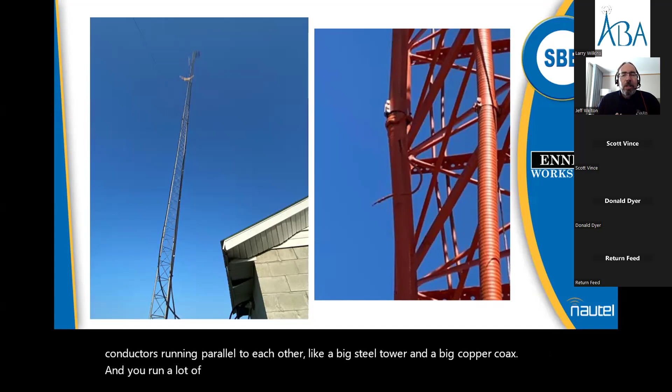Number one, if you've got two conductors running parallel to each other, like a big steel tower and a big copper coax, and you run a lot of current through one of those, you've got a capacitor, so you can induce a lot of current in the other one. Number two, a 24-inch or 36-inch ground lead, those are the two common sizes, makes a really good antenna for re-radiating a lot of spurious stuff.

So I've run into a lot of LTE interference complaints, for example, that have been traced back to grounding kits that weren't bonded well on the tower. And that's something else to realize.

We're going to use two words here a fair bit. I'm going to talk about grounding and I'm going to talk about bonding. Effectively, grounding is where you attach the wire and bonding is how you attach it. So bonding could be a mechanical bond, like just screwing two pieces of strap together, or an exothermic bond, like Cadweld, Sil-Fos, silver solder, brazing, whatever have you. That'll be my preference whenever I get it, and we'll get into a little bit about why that's important as we go too.

As you can see, this is a presentation that I built most recently for the SBE's Ennes RF 101 workshop, the 2-day workshop prior to NAB this year.

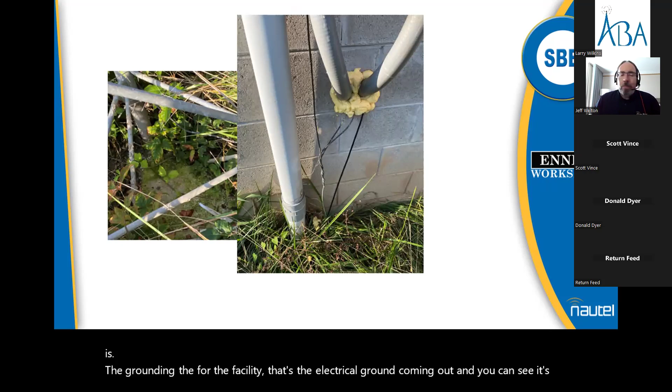So one of the things we noticed when I got out there was that what you're looking at in that right-hand picture is the grounding for the facility. That's the electrical ground coming out. You can see it's just a couple of soft ground copper, basically AM ground radial wire that's been twisted together. Once that oxidizes a bit, that's not a really good ground.

And the thing to remember most about grounding is that wherever possible, you want short, straight runs. You also want what we call common point ground or a star ground, single point grounding.

That can get a little tricky. If you're in a Cellco or cell company type building, the kind that have the green wire around the ceiling, the halo ground, those work great. But they've typically got a ground lead coming down from that halo at all four corners of the building and going outside. And if you connect all of those to a ground rod, you'd better strap all those ground rods together. Otherwise, you've just totally lost control of your grounding, and you got circulating currents everywhere.

I tell people I like halo grounding done right. The problem is I almost never see it done right. So that's something to pay a lot of attention to.

One of the other things I see a lot of is there will be an AC ground coming in from the power pole outside, and it'll come into the building at one side, and then the coax and tower ground are at the back side on the opposite end of the building. And if those aren't bonded together, that's a problem.

In some areas, you'll get some older electrical inspectors that'll still resist that. Since around 2005 or so, I don't remember exactly when, Article 250.4 of the NEC, the National Electric Code, is what deals with facility grounding. In the early 2000s, that code was edited to specify that the facility ground and the AC entrance ground must be tied together.

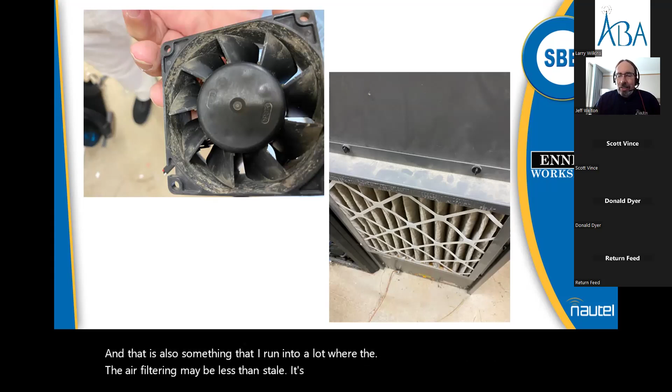Now, grounding on its own isn't going to solve all the problems. You need to keep the place clean, and that's also something I run into a lot, where the air filtering may be less than stellar. So that's also a challenge that we want to look after.

Back to the grounding and the tower ground. This PowerPoint got put together, and I don't know what happened in PowerPoint when I saved it -- it doubled some slides and threw some around in different orders. Anyway, getting back to the tower ground, you've got your ground kits on the tower.

Those are fairly, relatively speaking, low gauge, small gauge wires. They're typically in the range of 6 gauge, give or take, 6 to 4, in that range. Relative to, say, a 4-inch strap, that's got a fairly high resistance per foot and a fair degree of inductance for any high frequency component. So it's not an ideal ground.

The real purpose of those is to help bleed off any surge as it starts to build up, and they definitely need to be installed. They need to be there. They also break up that capacitance that I was talking about earlier, to cut down again on inducing stuff.

But really, once you get to the base of the tower, that coax needs to have a ground kit installed. I prefer to see them where the coax comes into the building, because you'll typically have a couple of coaxes -- maybe an STL coax, transmitters, maybe a translator or two -- and you can put a bulkhead panel right at the entrance to the building and put a ground kit on each of those cables and connect it to that bulkhead, then a single strap running down to your reference ground point. Short, sweet, and simple. That's really what we want to accomplish.

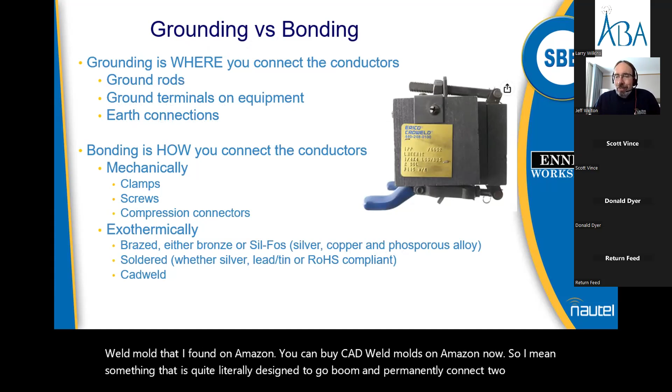Now, one of the things I mentioned earlier is grounding and bonding, and how I prefer exothermic connections, and Cadwelding is a good example. That picture is a Cadweld mold that I found on Amazon. You can buy Cadweld molds on Amazon now. So something that is quite literally designed to go boom and permanently connect two conductors is easy to get now. It used to be you could only get them at an electrical supply place, but yeah, Amazon, who knew?

And the good thing about it is that at that point, you're not relying on compression connections. And I really don't like compression connections. A challenge with compression connections is that anytime you have a wire in a clamp, and it's just a screwed down clamp, copper's malleable. It's this very soft metal, and it will deform to displace any air in that connector.

So unless you manage to get it yanked down tight enough to displace all the air on install, then in a week or two, that copper is going to have deformed a little bit to displace the air, and that connector is now loose. How many people have run into a situation with a crimp connector where somebody didn't have the proper crimp tool and just squeezed it with a pair of dikes or beat on it with a hammer, and it comes loose after a while?

So if you're going to do a crimp connection, it's essential to have the proper tool to do the job. If you're going to do a clamp connection, in some cases you don't have a choice. If you've got a ground wire and a flat like a bulkhead panel, it's hard to weld or solder a wire onto a piece of 4-inch by quarter-inch copper bar.

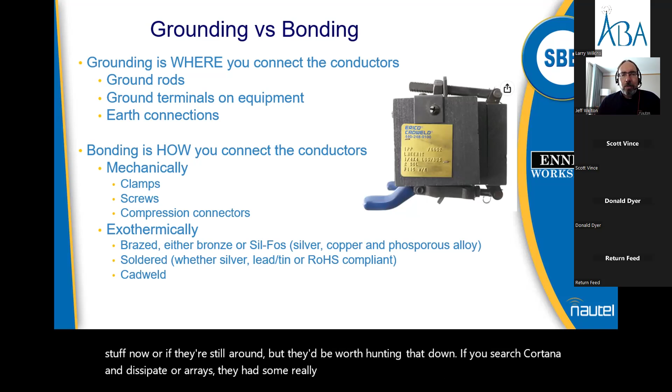Each room, studio, production room, whatever, has its own ground point. Maybe the TOC has a ground point, and then you tie all the grounds together to your facility ground, so you've still got single point grounding. You just do it in more of a branch format.

Again, the goal is to try to avoid running from one thing to another thing to another thing and then back, just creating ground loops. Those can be a little hazardous. So we definitely don't want to see that.

I ran into a site in San Antonio a bunch of years ago where they'd put in a transmitter, and he called me up and said, 'Hey, I installed those ferrites y'all gave us.' And I said, 'Cool.' I'll talk about ferrites in a bit too. But he said, 'Yeah, we got a problem. The ferrite on the main transmitter is getting warm.'

I said, 'Yeah, if it's getting warm, then you've got a ground loop because you need to have the feed and the return equal.' And he goes, 'You don't understand. The main transmitter's turned off. We're on the standby.' It turned out they had so many ground loops that there was a lot of RF current going through the shield of the main transmitter's coax, even when the transmitter was off.

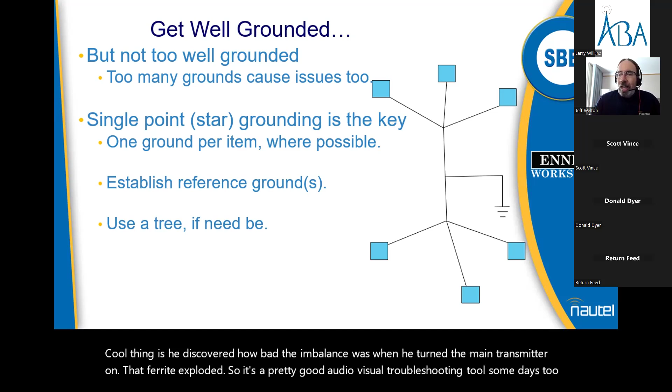The cool thing is he discovered how bad the imbalance was when he turned the main transmitter on. That ferrite exploded. So it's a pretty good audio-visual troubleshooting tool some days too. But that is the kind of thing that single point grounding will help eliminate.

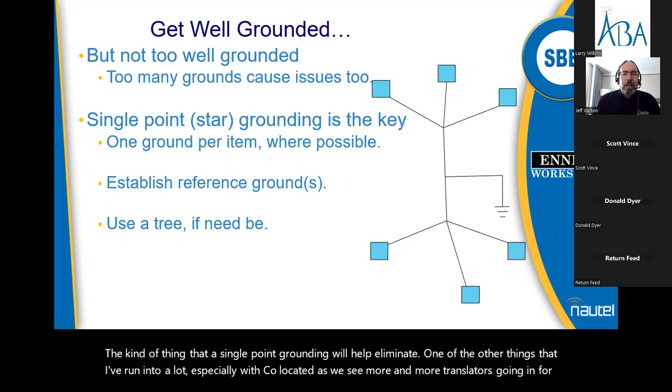One of the other things I've run into a lot, especially with co-located sites, as we see more and more translators going in for AMs, you co-locate an AM and an FM, and you can a lot of times get the audio from one onto the exciter for the other, depending on what you've got for gear. The grounding will quite frequently be a contributor to that as well. So just something else to think about.

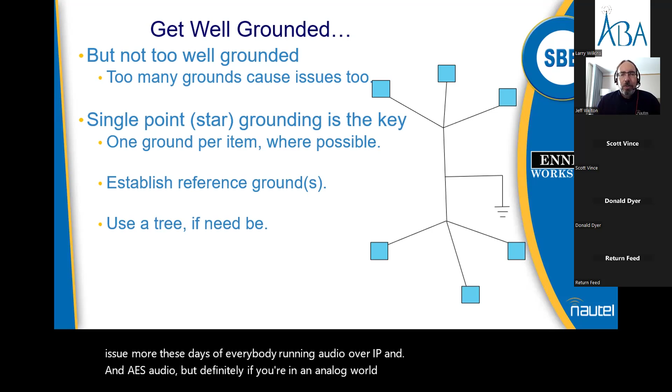That's less of an issue these days with everybody running audio over IP and AES audio, but definitely if you're in an analog world, it's pretty easy to induce RF onto an audio cable shield. So something else to think about.

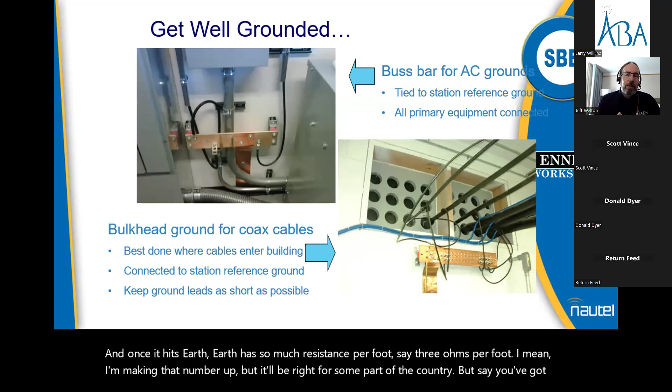Not because it's really all that much an issue, but we're playing a current divider game. If you start at the tower and head back to the AC lines, that's basically where lightning is going, because you get a big surge of current coming down a tower, and once it hits Earth, Earth has resistance per foot. Say 3 ohms per foot, I'm making that number up, but it'll be right for some part of the country. If you run 100,000 amps of current in a lightning strike down that tower at 3 ohms per foot, and you've got a 3-foot distance, that's 9 ohms. 100,000 times 9 ohms, E equals I times R. That's 900,000 volts developed from left foot to right foot, which is why they always tell you if you're caught in a field in a lightning storm, put your feet together.

There's more to that story. You put your feet together... anyway, I won't get into it in a recording.

Point being, everything we can do to minimize the resistance of the path we want the lightning energy to take, that's what we're going to want to do. So if I can make those wires 6 inches shorter, and they've got a resistance of 1/10 of an ohm per foot, collectively that may be a couple of ohms I've taken out of that path to ground, or that path between ground and the surge protector. That's the ultimate goal here: short and straight wherever we possibly can.

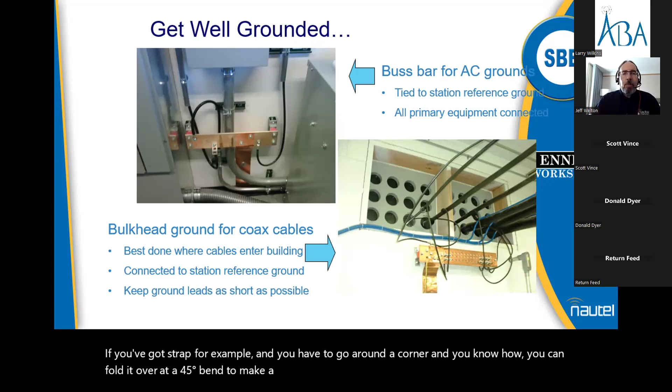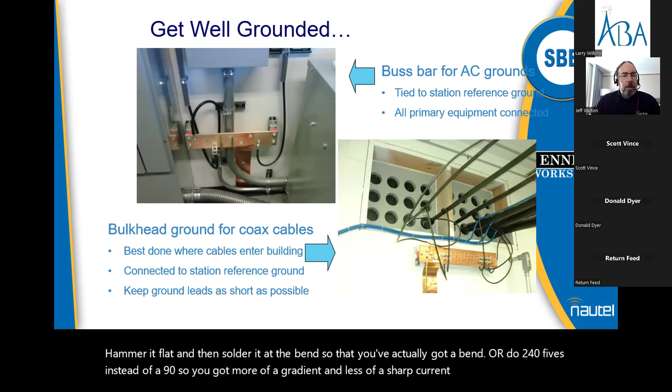If you've got strap, for example, and you have to go around a corner, you know how you can fold it over at a 45-degree bend to make a 90, hammer it flat and then solder it at the bend so that you've actually got a bend, or do two 45s instead of a 90. That way you get more of a gradient and less of a sharp curve. Lightning doesn't like to turn corners. Any amount of significant current doesn't like to turn corners. So, short, gradual gradients whenever you can.

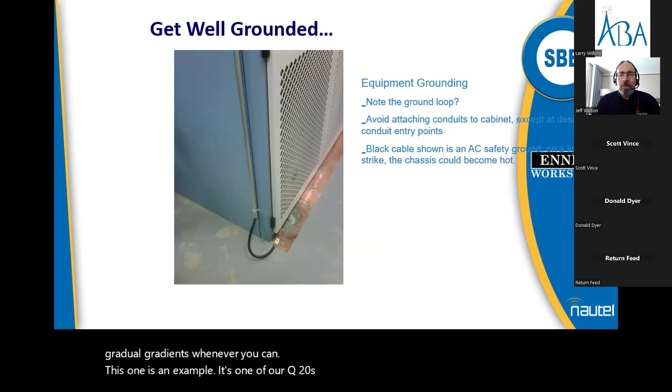This one is an example. It's one of our Q20s, a 20 kilowatt FM we built a bunch of years ago. I know there's one or two of them, or have been, in Alabama, and a bunch of various others. This one happens to be in Missouri, and they were having quite a few power supply problems.

We came in, or I came in, and started at the tower and walked back, because that's the easiest way to follow your grounding, is to quite literally follow your grounding. So you start at the tower and you walk your way back.

What I found was there was a beautiful, nice, bright, shiny ground strap at the base of the tower, and it went into the building, came around to the ground connection on the back of the transmitter. The surge protector had a ground wire, and it also had a wire running over to that ground strap, what you're seeing here coming out of the conduit.

Now, two things. Number one, as I followed this ground strap from the tower into the building, the one thing I did not see was a ground rod. So any energy coming down that 600-foot tower, or whatever height it was, was going straight onto that strap, right to the back of the transmitter. That's item number one.

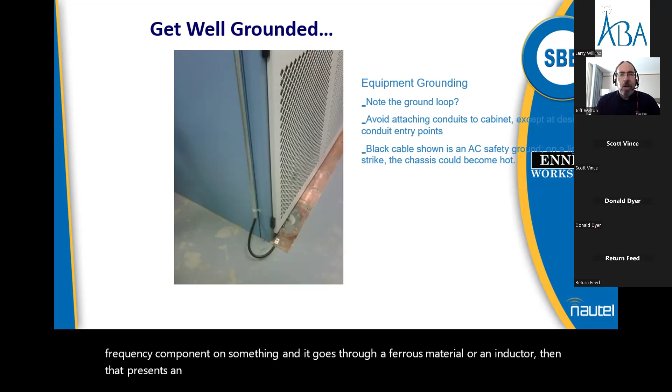Item number two, the primary ground, which is relatively speaking a fairly low resistance wire, that 2-gauge cable, is going through a conduit. Now, we'll talk about ferrites in a bit, but a ferrite is a ferrous material. If you've got any high frequency component on something and it goes through a ferrous material or an inductor, then that presents an impedance. Well, steel conduit is also a ferrous material. So you've got a one-turn inductor with that wire running through that conduit, which means you're adding more resistance.

So in this case, all this energy is hitting the ground connection at the back of the transmitter. There's no easy discharge path through the surge protector to the power lines. The only place for the energy to go to discharge was through all the switching supplies. So we put a ground rod out at the tower.

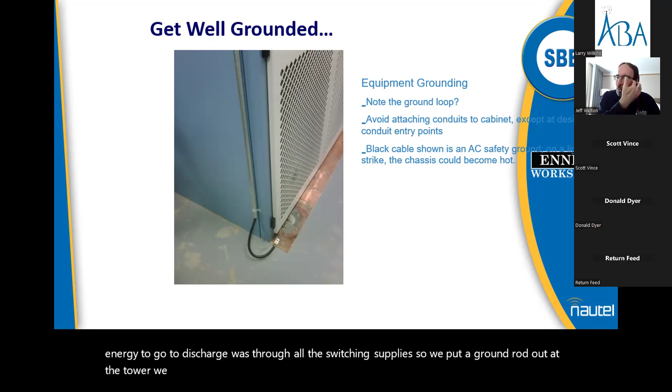We replaced the AC entrance ground rod because it was only a couple of feet long and driven at a pretty steep angle, and put a proper rod in there, bonded those two together outside the building, and then fixed the grounding to the surge box.

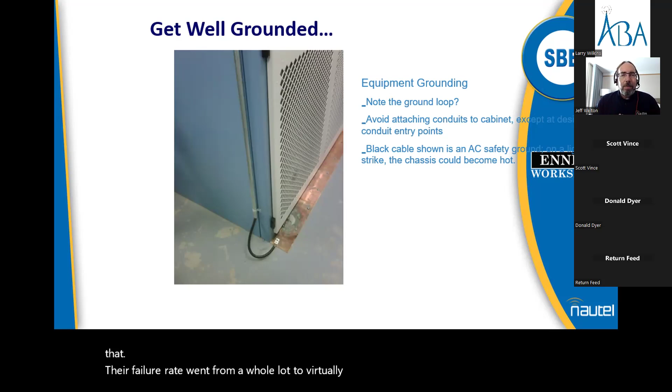In the process of doing that, their failure rate went from a whole lot to virtually none. I won't say none—they've had one or two failures, but that's over 10 or 15 years, not one or two every single lightning storm. So their repair cost has gone from thousands of dollars a year to less than $100 a year.

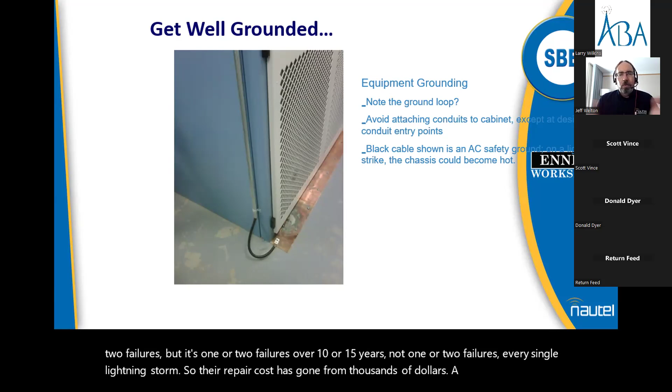This was the reference ground, by the way, an easy mistake to make. There was a piece of what looked like ground rod, and that's what they bolted to. Well, it turns out that was the J-bolt to hold the building down, not a real ground.

So we ended up running out to the ground rod. Sometimes it's the simple things that will get you. You'll see something and think, that looks like a good ground point.

I had one guy, as an example, whose friend was an electrician and told him that in a pinch, if he didn't have a ground rod, a cold water pipe would be a good ground. Well, the guy doing the install wasn't electrically oriented—he was a station owner just taking the best advice he could get. So he found a cold water pipe in the transmitter room and bolted onto that with a clamp for his ground connection. This electrician buddy didn't tell him that PVC water pipe is not the best ground. So that's what he was connected to. That's one of my favorite pictures too.

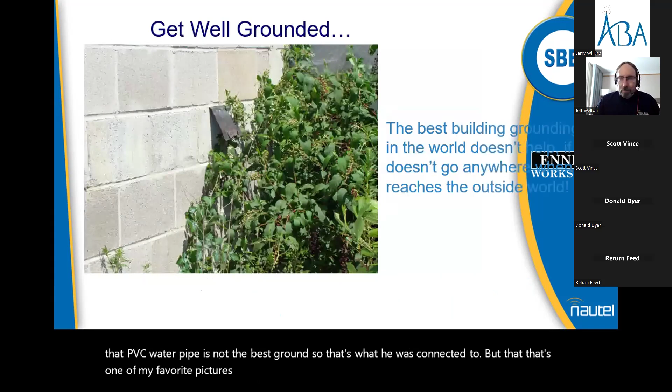Other thing is, and this comes back to what Larry and I were talking about before we started, you need to have a checklist, and part of that checklist needs to include a scheduled walkthrough at every site you maintain, whether you're a contract engineer, station engineer, or corporate engineer. You need to do a walkthrough on a periodic basis. How often that is will be determined by you and your site.

If you're up here in Wisconsin and you don't have a problem with people collecting copper for scrap value, it might be measured as a once-a-year type deal. If you're in a little less desirable neighborhood, like this one in Arkansas, it might have to be a little more often. This was one where they were losing a lot of stuff on their 50 kilowatt.

Everything in the building looked perfect—point to point grounds, bolted down nicely, things are beautiful. Got outside and moved that bush. That's also where I discovered what chiggers were, but that's a whole different story for another day. Discovered that the ground strap didn't go anywhere—the ground system had been lifted. So they didn't have a ground.

That's the kind of thing that needs a physical inspection on a regular basis.

Walked into a site not too far outside of Montgomery a while back, a few years ago, owned by one of the bigger site groups, and discovered that the bulkhead was there. Everything, all the coaxes, were nicely connected to the bulkhead. Two ground leads that didn't go anywhere—they were cut about 6 inches off the bulkhead panel. So again, it needs physical inspections here and there.

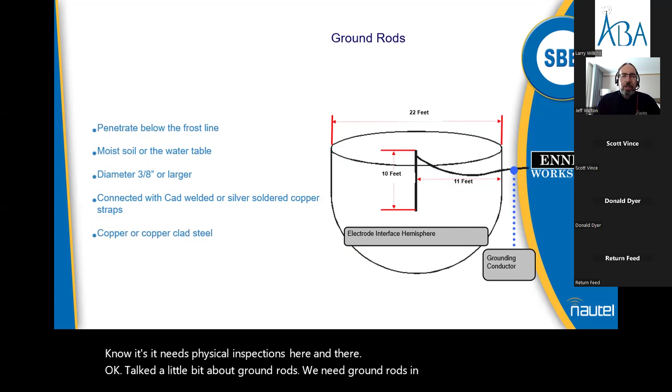Talked a little bit about ground rods. We need ground rods—in the ideal world, they'll get to the water table. In some parts of the world that's not possible, in which case you make do with as much copper as you can. I like chem rods if you're in a really high and dry situation, like on a mountaintop where you can't get to the water table. You can do a chemically augmented ground system—that's not a bad thing.

Thing to remember with ground rods is that they have what's called the electrode interface hemisphere, a useful radius around the rod that's essentially equivalent to the amount of the rod that's underground. So if I've got a ground rod buried 10 feet underground, the useful radius is ballpark about 10 feet. So I could put two 10-foot ground rods 20-odd feet apart, 22 feet apart, and they'll be at maximum efficiency, maximum effectiveness.

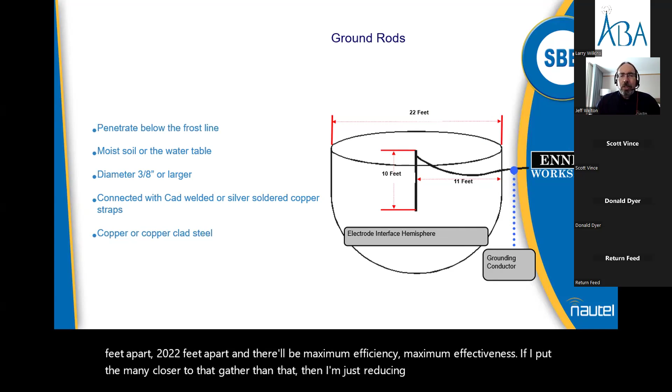If I put ground rods any closer together than that, I'm not reducing their usefulness entirely, they're still useful, but like two ground rods, if you put two 10-foot ground rods a foot apart, you basically did all the work to drive two ground rods and got the equivalent of one 11-foot ground rod. So you're just minimizing the efficiency of the system.

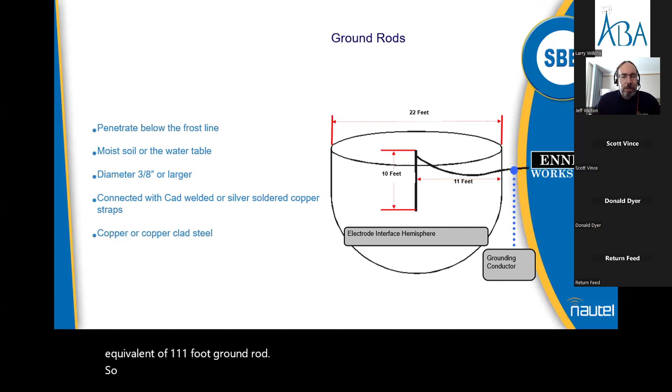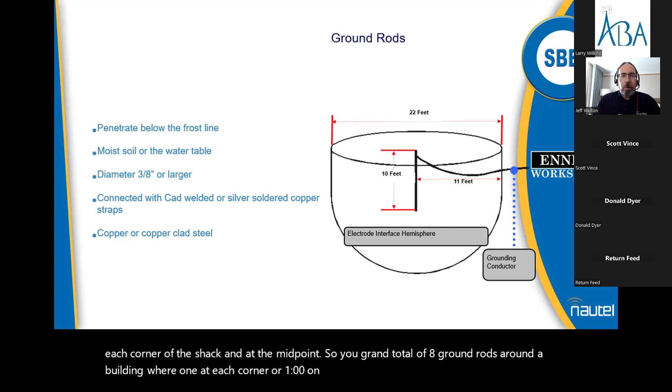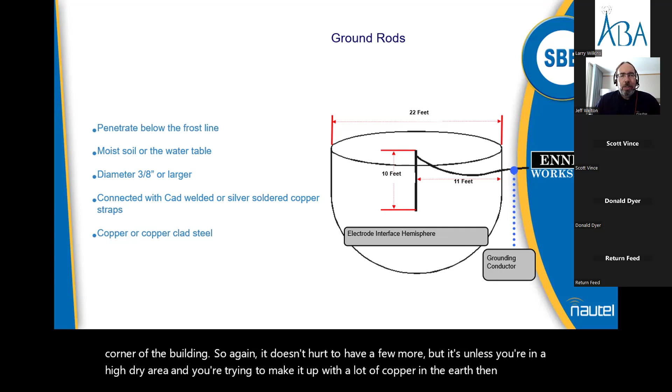I give an example. I run into a lot of situations where somebody has an 8x8 transmitter shack at the foot of a tower. They'll have a couple of ground rods at the base of the tower, then a ground rod at each corner of the shack and at the midpoint. Grand total of 8 ground rods around a building, where one at each corner or one on diagonally opposing corners probably would have been plenty. Or depending how close you are to the tower, you put one at the tower and one on the far corner of the building. It doesn't hurt to have a few more, but unless you're in a high, dry area and trying to make up for it with a lot of copper in the earth, you hit a point of diminishing returns pretty quickly. That's just something to pay attention to.

Talked about ferrites earlier, and the most useful thing about ferrite is, well, two things. Number one, it adds a little bit of inductance. For any high frequency component in a lightning strike, and lightning does have a fast rise time and typically some ringing at the carrier frequency on it, so there is a high frequency component involved, a ferrite makes an inductor, which means it's going to increase the effective impedance to a lightning strike.

As I said before, this is a matter of degree. We're playing a current divider game where we're trying to make the path through our equipment look the least attractive, and the path through the surge protector, which we'll talk about momentarily, to ground, the most attractive, or from the surge protector between the AC lines and ground—we'll talk about that in an overall view shortly. So the ferrites help that way by raising the effective impedance of the equipment if you put one on the cables, like coax and AC lines, between the equipment and your common point ground.

The other thing ferrites do is, if you get a common mode surge, so you've got a feed and a return going through a ferrite, and as long as the currents are equal, the ferrite's just an inert lump of carbon and iron filings that does absolutely nothing. But if you get a surge on one or the other—say you got a tower strike on an AM that spikes the center conductor hot, or a tower hit on an FM where the coax shield gets hot—then in either direction, when you get a common mode surge on one conductor, not the other, the ferrite will saturate, and it effectively induces a magnetic field that tries to induce current flow in the opposing conductor. So you essentially equalize your surge, if you will, between the two conductors. That's a vast oversimplification, but that's effectively what it does.

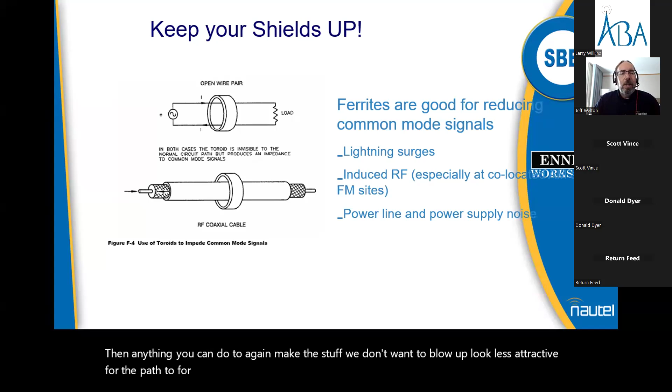So the goal with a ferrite is, like I said, it's not on its own going to do anything. If you've got bad grounding or don't have a surge protector, slapping a ferrite on there isn't going to do you any good—you're still going to have failures. But in this current divider game I keep talking about, if you've got good grounds, a properly installed surge protector, and a well-established path for lightning to flow, then anything you can do to make the stuff we don't want to blow up look less attractive for the path for lightning energy to flow, the better off you are. So where do you put ferrites?

Anywhere where you have a feed and a return. You can put them on all your coaxes, STL coaxes, satellite dish feeds, obviously on your antenna for your transmitter, and put them on the AC lines. One ferrite with all the feed and return going through it is just fine. You can wrap the individual legs through a ferrite to make chokes on each one—that's a little less of a benefit, but still a benefit. I tend to just go with one ferrite over all the leads. If you can loop them around and run them through again, so much the better—you just went from a one-turn choke to a two-turn choke, so you double the inductance or double the impedance, because that's linear math.

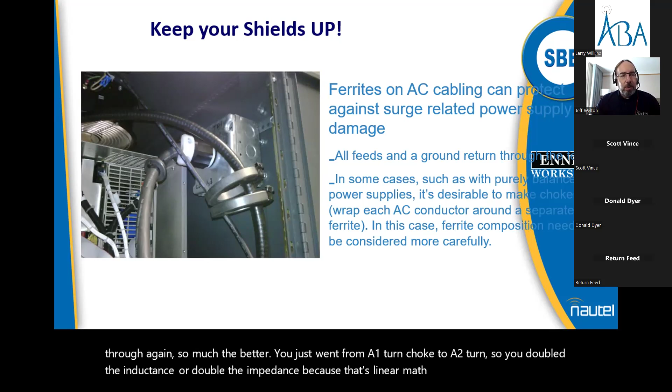Now, the benefit on the current divider, that's a different story, but again, little bits. It's all a matter of degree.

Okay, so the surge protector is the third piece. You've got the single point grounding, short straight runs, the ferrites, which probably should have been third, and the surge protector - that's your triumvirate for lightning protection. And the surge protector needs to be as close to the mains entrance as you can get it.

Reason being, the electrical wiring to the surge protector from the mains panel will be the highest inductance or highest impedance conductor, because your ground strap, or all your other grounding, will tend to be relatively lower inductance or lower impedance than the electrical wire. So get it as close to the mains panel as you can. It needs to have a path between ground and AC.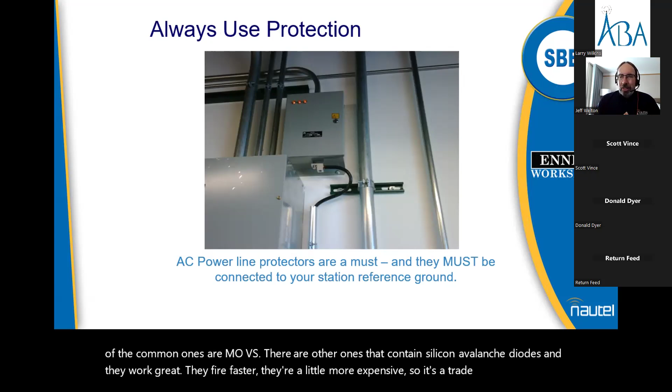Okay, the deal with a surge protector - most of the common ones are MOVs. There are other ones that contain silicon avalanche diodes, and they work great. They fire faster. They're a little more expensive, so it's a trade-off. And ultimately, this whole lightning protection game is a trade-off.

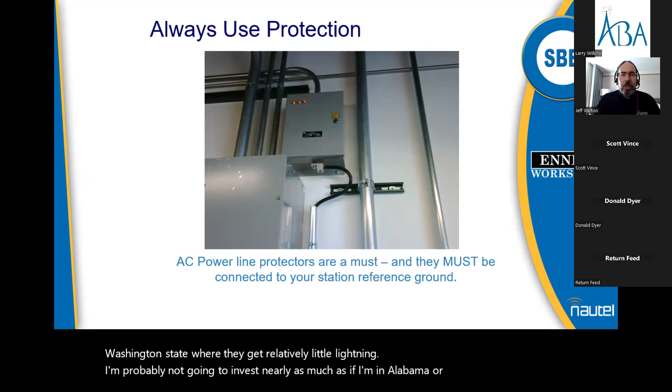So if I'm in, say, Washington State, where they get relatively little lightning, I'm probably not going to invest nearly as much as if I'm in Alabama or Florida or down in the Southeast. If I've got a $5,000 translator transmitter at a site, I'm probably not going to drop $500,000 on grounding and surge protection. Whereas if I've got an 80 kilowatt FM plus HD system that runs on the wrong side of $250,000, or a TV site where it could be well over $500,000, then I'm going to invest a little more on protecting that investment. So again, there's an ROI formula that needs to be done almost every time.

But at the very least, single point grounding, surge protector, and throw some ferrites on there as an added bonus. Now, the surge protector is the path between the AC wiring and ground.

You remember I said earlier, ground's got a resistance. So if you run a lot of current down the tower from a lightning hit, it hits that earth with that resistance, and there's going to be basically a voltage created. So you're going to have potential there.

Well, after that potential gets above the potential of the AC lines, which typically are going to be 240, 480, 600 volt, then the AC lines, with all their millions of miles of wire and inductor transformers and ground leads, become a much more attractive path to dissipate.

So at that point, all this energy at the base of the tower - here's something to think about. I would hazard a guess that the vast majority of switching power supply failures, whether it's wall warts on a processor or remote control, or switching supplies inside a transmitter, the vast majority of those failures are probably from tower strikes, not from AC line strikes.

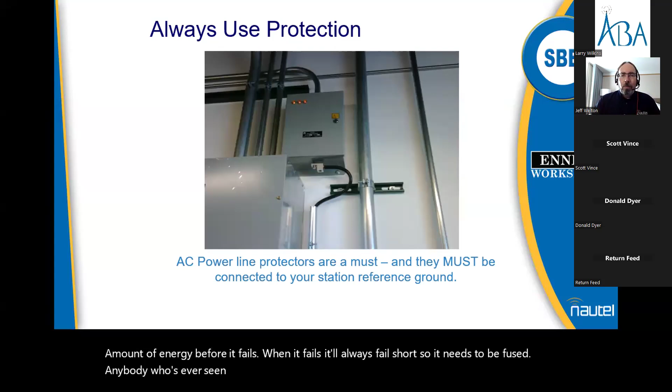It will absorb a certain amount of energy before it fails. When it fails, it'll always fail short, so it needs to be fused. Anybody who's ever seen an MOV on a transformer where you've got two legs and a little puff of white dust in the middle has seen the impact of what happens when an MOV is unfused.

By the same token, you don't take the fuses that failed out of this particular box on the wall in this picture and replace them with 7/16" bolts. Okay, I don't know what current a 7/16" bolt can handle, but I can promise you it's a whole lot more than the 40 amps that the original paper cartridge fuse would blow at.

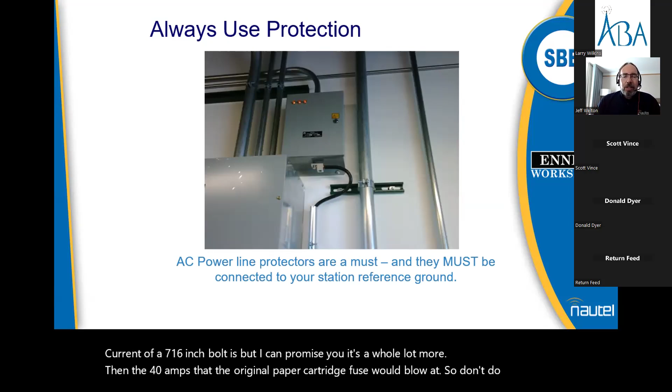So don't do that. Alright, because an MOV will 100% of the time fail short. If it's not fused, it will then fail open very, very catastrophically - and usually with a lot of loud noise and some smoke and a few cuss words from anybody in the vicinity. So the MOV goes between your AC line and ground.

And if you do happen to get a power line strike, if the voltage goes above the clamp level of the MOV, it clamps and shunts that voltage to ground. Life is grand. The equipment never sees it.

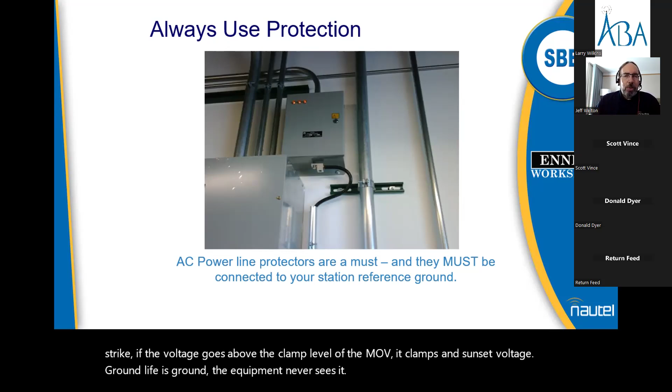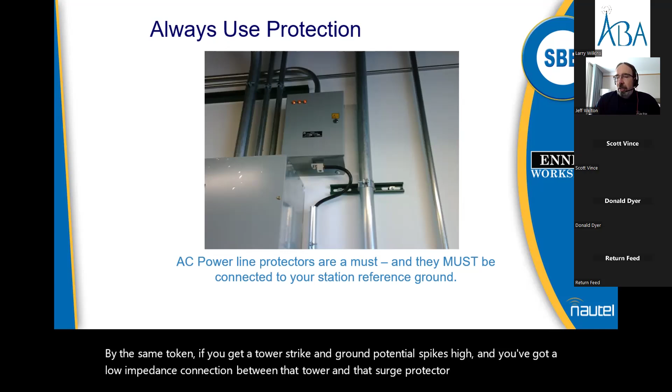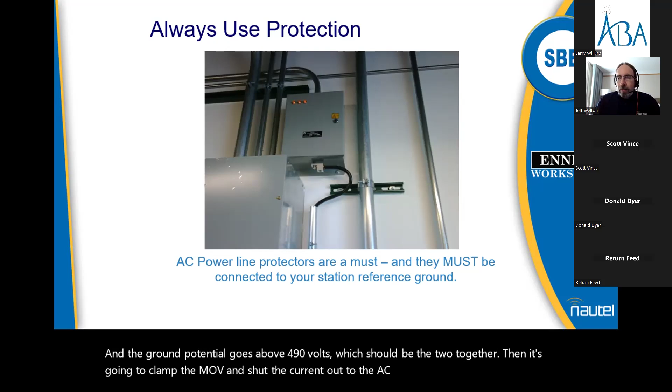By the same token, if you get a tower strike and ground potential spikes high, and you've got a low impedance connection between that tower and that surge protector, it doesn't care which direction the surge is going. If you've got a 240 volt entrance with a 250 volt MOV and the ground potential goes above 490 volts—which should be the two together—it's going to clamp the MOV and shunt the current out to the AC lines. That's our ultimate goal: have the energy go around the equipment, not through it.

There are tons of different MOV or surge protectors out there, whether they're MOVs or silicon avalanche diodes is less a concern. LEA, PolyPhaser, transtector, control concepts—we use a company called Raycap, which we've really liked working with. You get cheaper disposable ones from a company called Mersen. LEA makes cheaper ones as well. So there are a bunch of different options out there. The only thing critical is that you have one installed and put it as close to the panel as you possibly can.

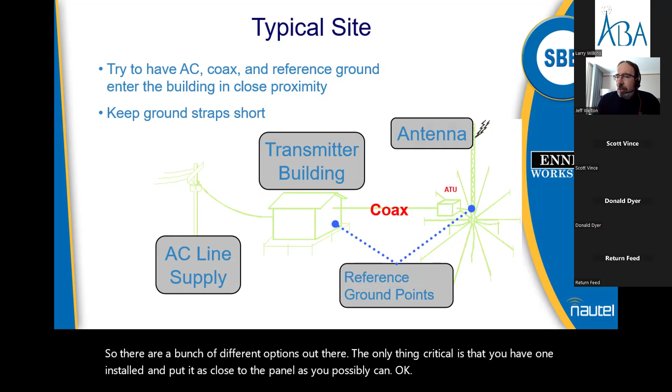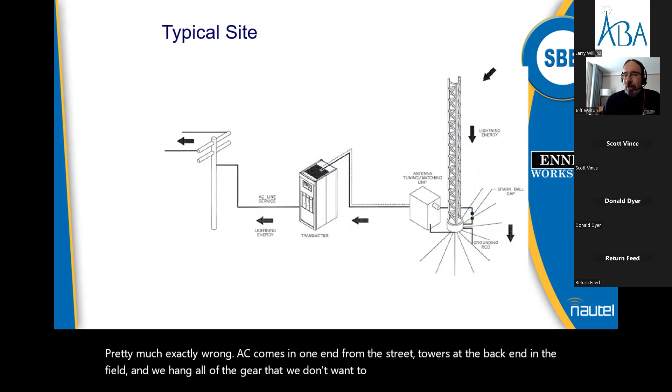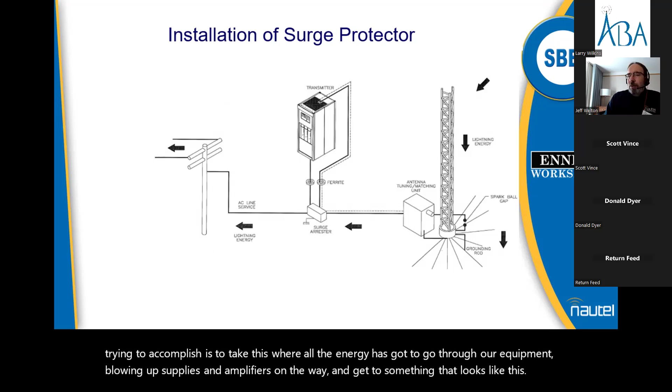The challenge is that the average transmitter site is built pretty much exactly wrong. AC comes in one end from the street, the tower is at the back end in the field, and we hang all of the gear that we don't want to blow up in between. What we're trying to accomplish is to take this, where all the energy has got to go through our equipment, blowing up supplies and amplifiers on the way, and get to something where the surge protector becomes the path between ground and the AC lines.

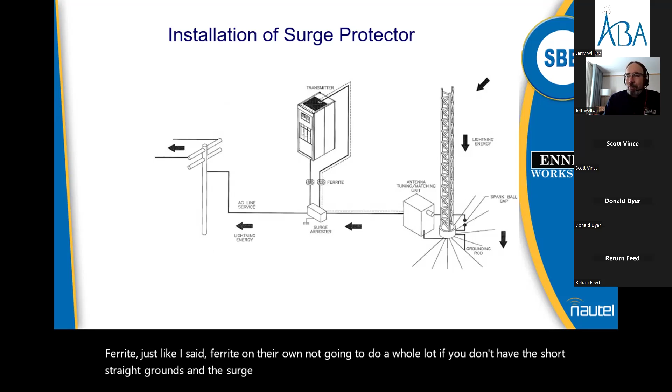Ferrite on their own is not going to do a whole lot if you don't have the short straight grounds and the surge protector. But if you've got a site where the grounding is done perfectly, the surge protector's in right, and everything has been proofed and verified to be as good as it gets, and you're still seeing some failures, ferrites might make that little bit of difference that just tips you over the edge. So definitely something to pay attention to.

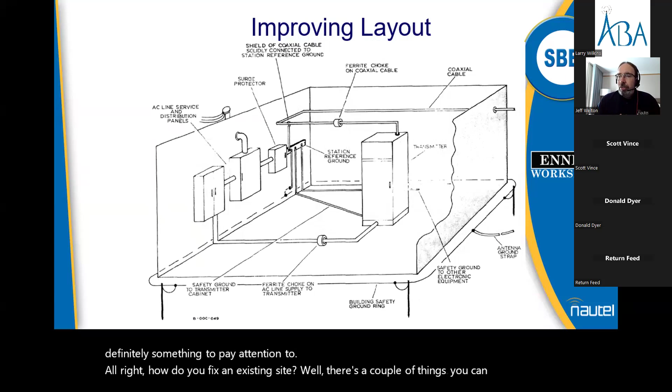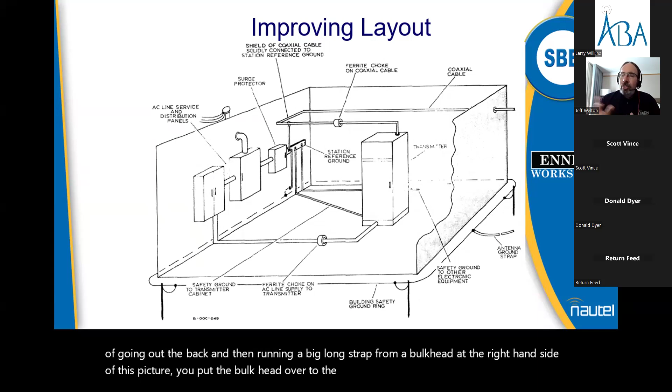How do you fix an existing site? There's a couple of things you can do: put in the surge protector, establish a reference ground point. Maybe reroute the coax so that instead of going out the back and running a big long strap from a bulkhead on the right-hand side, you put the bulkhead over to the left and reroute the coax. That does two things—you've increased the length of the coax, which increases its resistance, but you've improved the overall connection and decreased the distance to the ground point. So there are various things you can do to fix an existing site.

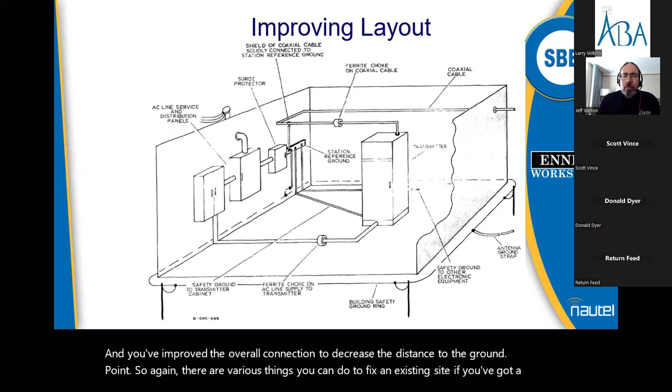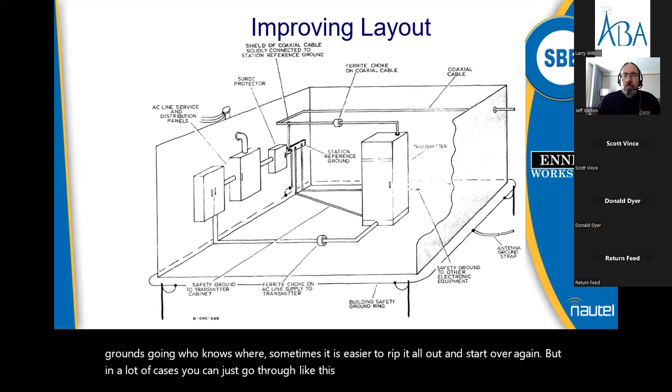If you've got a site that has evolved over a whole bunch of years with a whole bunch of rooms and grounds going who knows where, sometimes it's easier to rip it all out and start over. But in a lot of cases you can just go through it, like this one in Missouri—our total cost was two ground rods plus a $150 hammer drill attachment to drive ground rods into hard Missouri clay. So ballpark $250 there, plus a day of my time and half a day of their engineer's time. We reused the existing copper, so there was no additional cost in that regard. Just something to think about.

Don't know who's calling me in the hotel room. Nobody even knows I'm in here, but there you go.

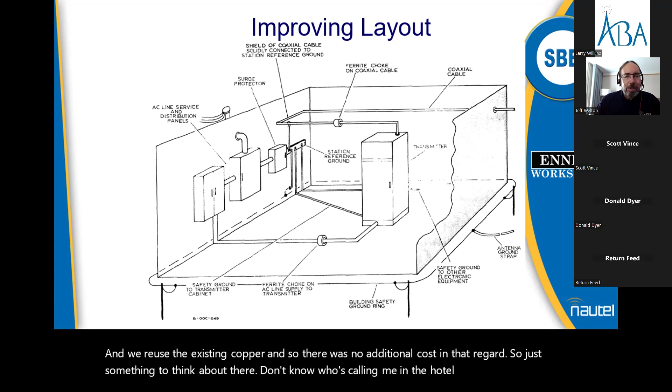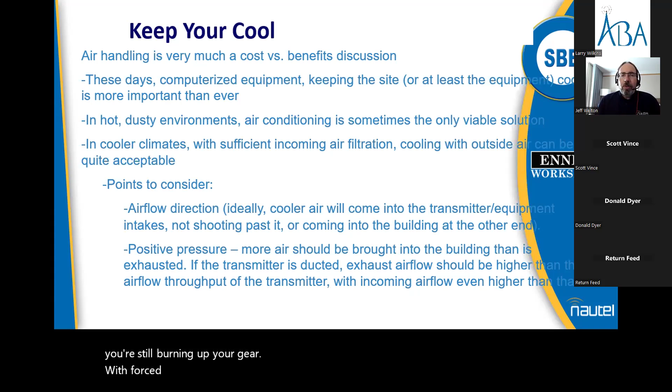The other thing we run into a lot, especially this time of year—it's been a hot year—is air handling. There are two things we really need to consider with air handling, more so with forced air, but even with air conditioning, I've seen this get ignored a lot. We need to look at airflow direction. If you're air conditioning a room and not forcing the cool air through the equipment, you've made the people comfortable but you're still burning up your gear. With forced air that's even more critical—the air needs to go through the equipment that's being cooled. We'll hit that in the next couple of slides.

Intake air has to be filtered. We really like positive pressure. So if you bring filtered air in with an intake fan and then exhaust it with an exhaust fan at a lesser amount—say I've got a transmitter with 1,000 cubic feet per minute of air throughput, and I bring 2,000 CFM into the building, dumping it directly into the transmitter air intake, then use my exhaust fan to pull 1,000 CFM out—I've got 1,000 CFM of positive pressure. That means filtered air is leaking out of every crack and crevice in the building.

And you'll see it because of the way the door opens. If your door swings out and you turn the doorknob and it blows open in your face, you've got good positive pressure. If you have to pull to get the door open—what we run into a lot—the building will have an air filter intake but no intake fan. They'll have a big exhaust fan dragging air out of the building, and it's also sucking dust in through every crack, crevice, and nook and cranny.

So that's the reason for positive pressure. It keeps the room a lot more dust-free. Especially with tube rigs, but even with solid state ones, the less dust you get in it, the less chance you're going to see arcs happen.

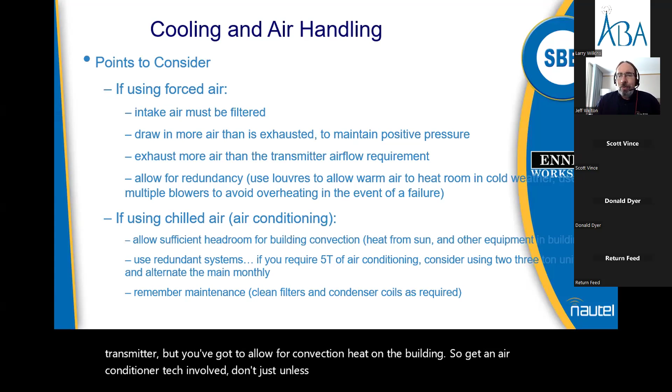And typically when an arc happens in a piece of RF gear, that's considered a bad thing. By the same token, I've run into a lot of sites using air conditioning where they'll get a hot day in July and the AC can't keep up, and they'll call and say, hey, you said we only needed a 5-ton air conditioner for this 60 kilowatt transmitter. And it's like, yeah, for the transmitter, but you've got to allow for convection heat on the building. So get an air conditioner tech involved. Unless you've got the training, don't do the math yourself—it's not something I'd be good at, and there are others better at it than me.

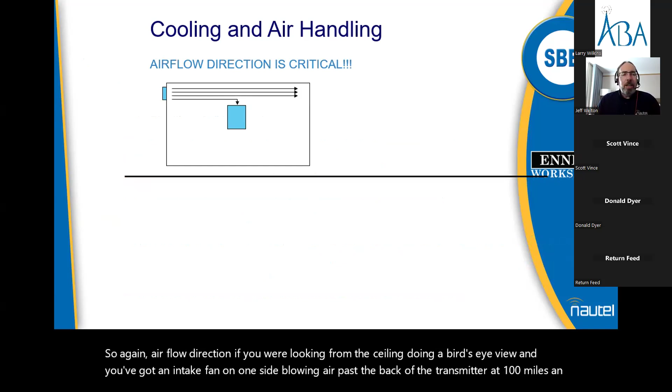So again, airflow direction: if you were looking from the ceiling, a bird's-eye view, and you've got an intake fan on one side blowing air past the back of the transmitter at 100 miles an hour, you're creating a negative pressure zone and not cooling the equipment. You need to force the air through the equipment you want to cool. This is critical with some transmitters more than others.

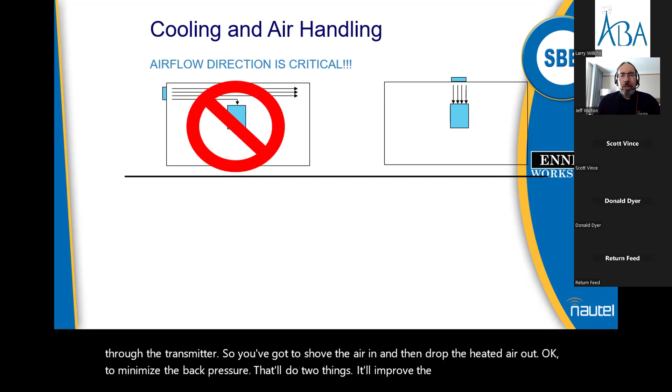So two things to remember. Some transmitters have an airflow path that takes a lot of twists and turns, so there's a lot of inherent back pressure in the design, which means you absolutely need to force the air through the transmitter. You've got to shove the air in and then draw the heated air out to minimize the back pressure. That'll do two things: it'll improve the cooling of the equipment, and it'll extend the lifespan of the fans in the equipment because they're not working against as much back pressure.

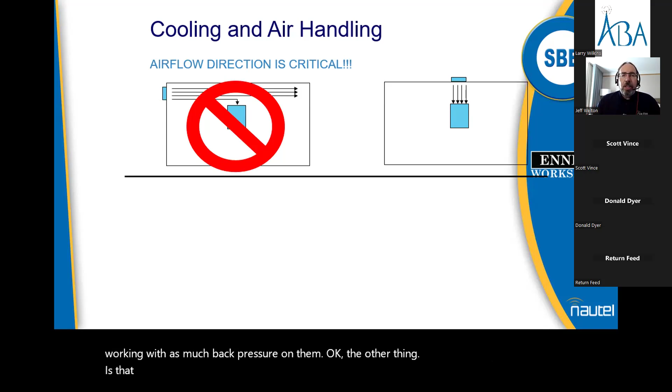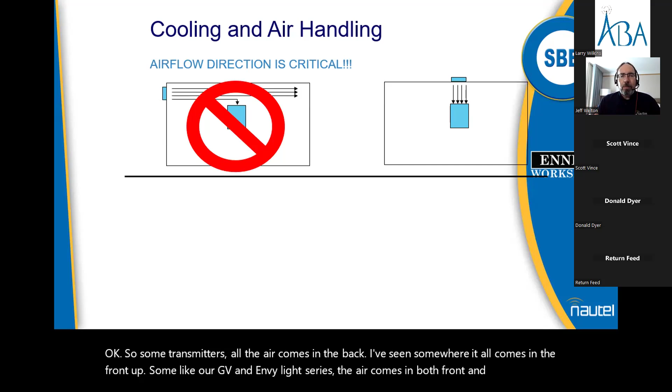The other thing is you've got to pay attention to where the air intakes are located. Some transmitters, all the air comes in the back; I've seen some where it all comes in the front. Some, like our GV and NVLT series, the air comes in both front and back—in the front for the power supplies, it makes a U-turn and mixes with the air coming in the back to cool the modules and combiners. So pay attention to what the manufacturer tells you and make sure your airflow accommodates that.

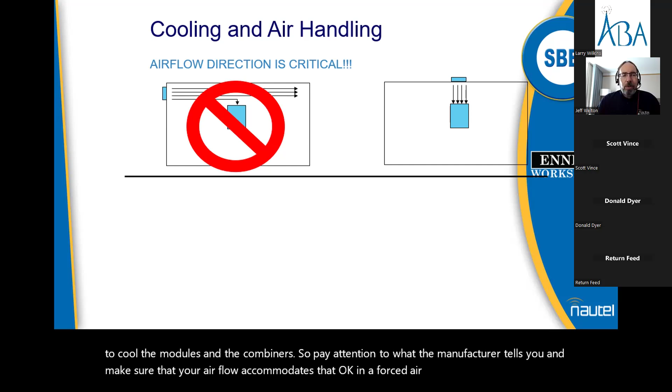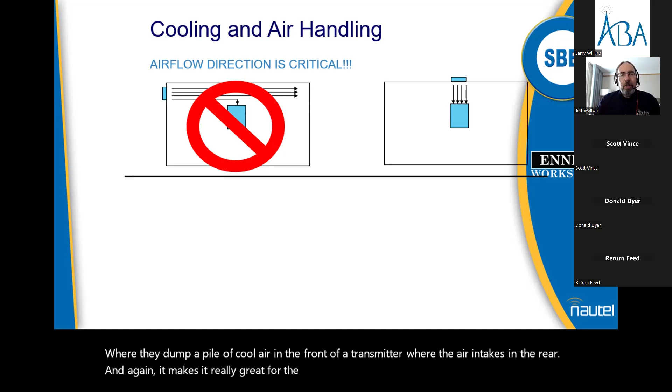In a forced air system this is even more critical, but it's also important in air conditioned sites. I've run into a lot of air conditioned sites where they dump a pile of cool air in the front of a transmitter where the air intake's in the rear. It makes it great for the operator, but the operator's not standing there 24/7, and that transmitter is. So make sure we keep the transmitter cool—we don't cool the building for the operator's enjoyment.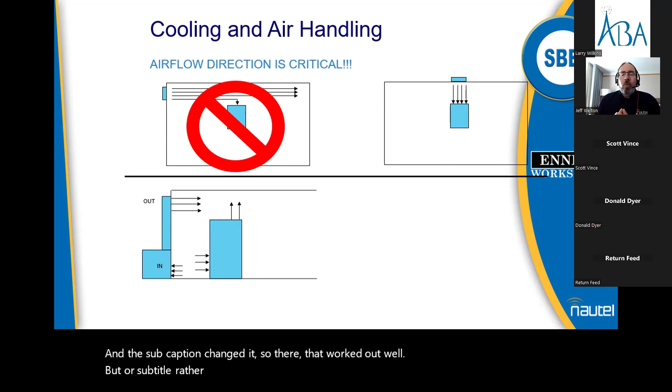The other challenge is with split units designed for office and living space—the ones that send cool air out the top and have the warm air return down low.

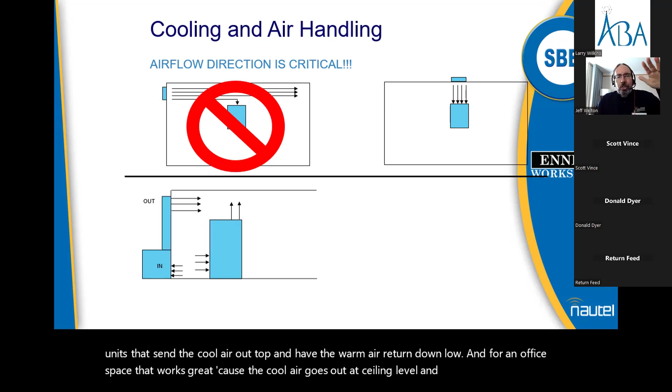And for an office space, that works great because the cool air goes out at ceiling level and then cool air sinks, settles down, cools everybody in the building, and nobody gets a breeze in their face.

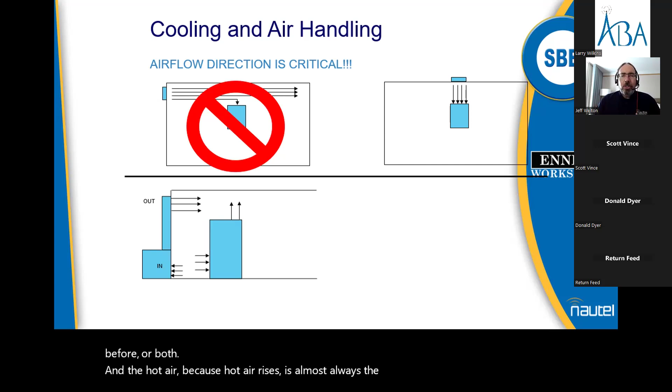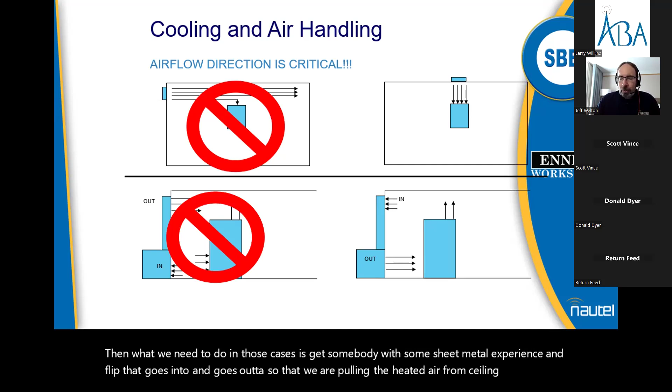For a transmitter facility where the air intake is usually low, at the back or front, or both, and the hot air, because hot air rises, the outflow is almost always at the top, what we need to do in those cases is get somebody with sheet metal experience and flip what goes into and goes out of, so that we're pulling the heated air from ceiling level where it's going to be and sending the cool air down at ground level.

Again, pay attention to the transmitter's specific air intake locations. You may need ducting to provide air front and back, or you may need to move the ducting to put air around to the opposite side only. It'll depend on your site, but what you absolutely do not want to do is cool the room and not cool the equipment. I've walked into rooms that were almost meat locker cold with transmitters showing controller temperatures on the wrong side of 100 degrees. So definitely pay a lot of attention to that.

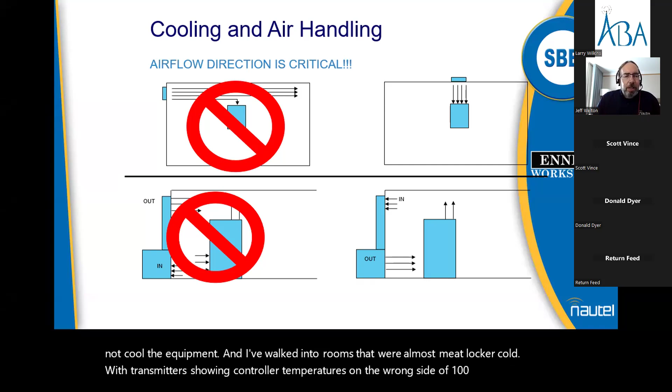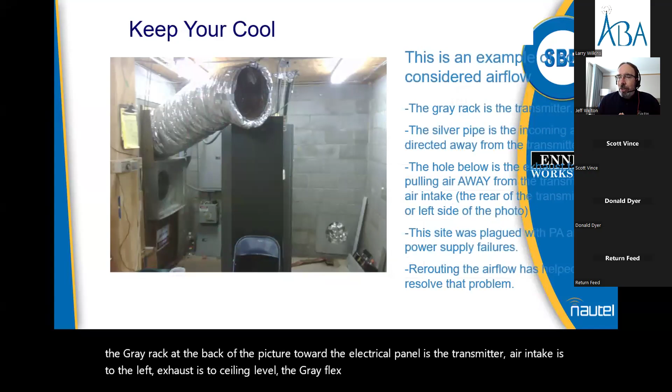Okay, this would be a good example. In this particular situation, the gray rack at the back of the picture toward the electrical panel is the transmitter. Air intake is to the left, exhaust is to ceiling level. The gray flex hose, that big 2-foot flex hose, is the cool air outflow, and the warm air return is the fan right below it, pulling the air away from the transmitter intake.

So the transmitter was getting super hot, and it was seeing a lot of supply failures. Supplies will tend to go first — switching supplies don't like to run hot. Depending on the transmitter, if you run HD gear, HD controllers, computers don't like to get hot. So there are various things. Controllers in general don't like to get hot. So pay attention to the airflow and make sure.

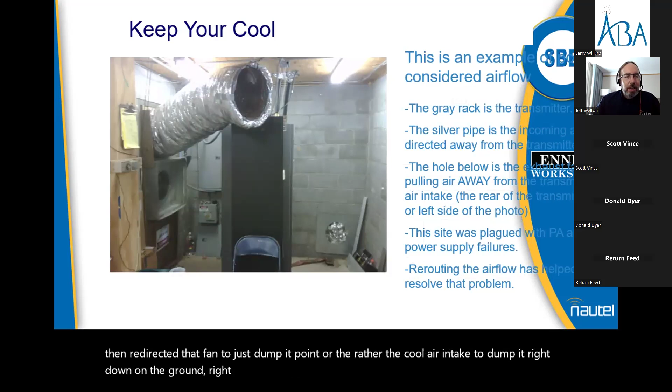In this case, what we did was put an exhaust duct above the roof of the transmitter, connected it to the outflow, and then redirected that fan to dump the cool air intake right down on the ground right behind the transmitter. Again, reusing what was pretty much already there, we didn't have to add a lot of cost to it, but we were able to fix it with what we had. So just something to think about.

Other thing to pay attention to is you can overdo it with air conditioning. Make sure that your air conditioning is sized so that it runs often enough to remove the humidity from the room, because every transmitter out there is spec'd for 0 to 90 or 95% humidity, non-condensing. And that non-condensing part is key, because if you've got an extremely oversized air conditioner that's not cycling often enough to keep the humidity level down, you're going to end up creating some condensation. And I'm here to tell you, electronics do not like water.

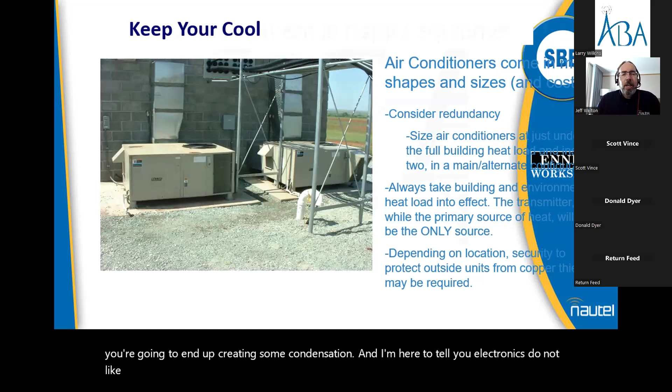Okay, so those are the key things, really. It's like I told somebody once: cool, clean, and well grounded are the three things. I don't care what piece of electronic gear you're working with — if you follow those three philosophies for everything, it'll all live a whole lot longer and you get called a whole lot less.

I've had people ask me how often should I replace the air filters, and the answer is I don't know — it'll depend on your transmitter site, it's specific from one to another. Up here in the upper Midwest in cottonwood season, I've got sites where they swap out the filters almost weekly for a couple of months in June, a couple of weeks at least. Now for the rest of the year, it might be every 3 or 4 months. So it does vary and depend on your site. I've got customers with sealed air conditioned buildings where the transmitter filters only get replaced every 2 or 3 years, if that.

So one of the things you can pay attention to is if you've got a thermometer with remote readability, and there are so many of them out there now — shoot, even some of the Wi-Fi temperature meters for cooking barbecue, whatever.

Get one sensor and hang it at the intake, get another and hang it in the exhaust stack, and pay attention to the delta, the difference between intake air and exhaust air. On most of our gear these days, our design spec is 10 degrees Celsius or 18 Fahrenheit between intake and exhaust at full power. If you see that, everything's grand. If you're higher than that, you need to address it. Whatever gear you've got, whether it's us, GatesAir, or Elenos, every manufacturer should be able to give you an idea of their typical heat rise, so you can measure intake versus exhaust air and have a good idea if you're within spec.

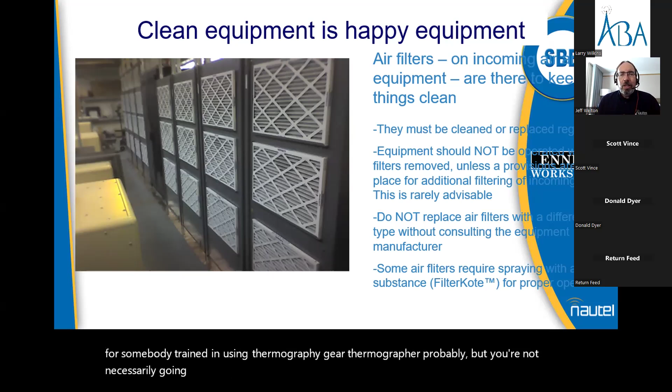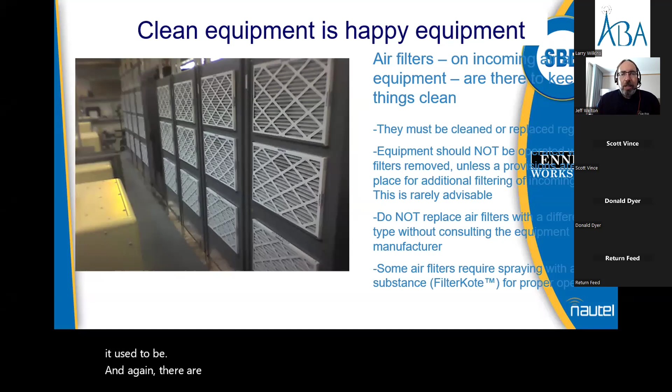I don't have it right at hand, but another thing I'm a big fan of is the little thermal cameras like the FLIRs. I like the FLIR because I can plug it into my iPhone and it turns the camera into an infrared camera. Unless you're a certified thermographer you're not necessarily going to get an exact reading, but if you use the same method to take the shot every time, you should at least have an indication of whether something's hotter now than it used to be. There are lots of courses you can take to learn how to use these things, so it's a really useful skill to learn.

Especially for things like circuit breaker panels. We talked about the walkthroughs too, and I see Larry unmuting, I think he has an idea.

Oh, I was just going to say, yeah, we did that once before, and we put a meat thermometer in the outtake so we could read it. And we knew that we were running okay as long as it stayed on lamb chops. That was our key, was it sitting on lamb chops, we knew we were okay.

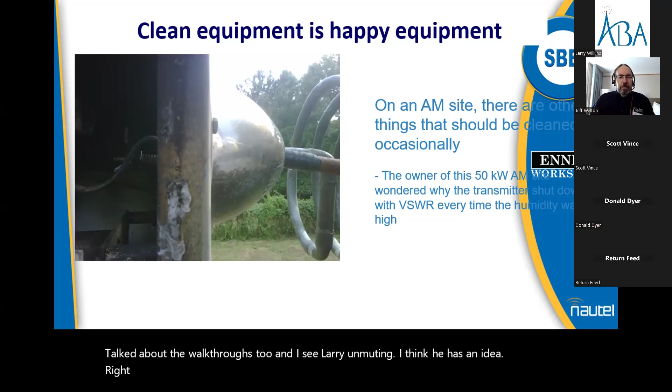And these days with the little PTZ cameras for next to nothing, you can get a Wyze PTZ camera for 60, 70 dollars. So even if you've got a regular old dial-up meat thermometer stuck into an exhaust vent, you can have a PTZ camera aimed at it and read it over the internet. I don't know about lamb chops necessarily, but that's going to stick with me for a while now.

Let me see, I think my battery might be dead on this, but let's find out. Now I've got to find it, so I've got the iPhone attachment on, and it is connected, so I should be able to, if I can remember how to work this thing. I'm just going to hold it up to the camera in a second, but FLIR.

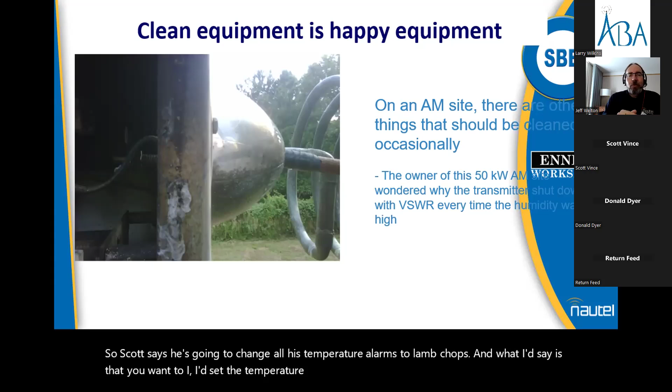So Scott says he's going to change all his temperature alarms to lamb chops. What I'd say is you want to set the temperature alarm for medium rare, rare, and well done. That'd be my cue: uh-oh, yep, transmitter's well done, too late.

But this picture here comes back to the walkthrough requirement too. This is the bowl insulator on the ATU for a 50 kilowatt AM, and ants had built a nest in it. Every time it got humid, which in Arkansas it did a lot, it would start arcing, which really reduced the ant population, but it didn't do anything to keep the transmitter on the air.

So, that's my nutshell. Keep it cool, keep it clean, keep it well grounded. Let's be careful out there, because there's nowhere near as many engineers as there were when I started doing this 34 years ago.

I have one question to ask. Somebody asked me: if you put a ground rod at the tower and a ground rod at the transmitter building, do those two ground rod systems need to be tied together?